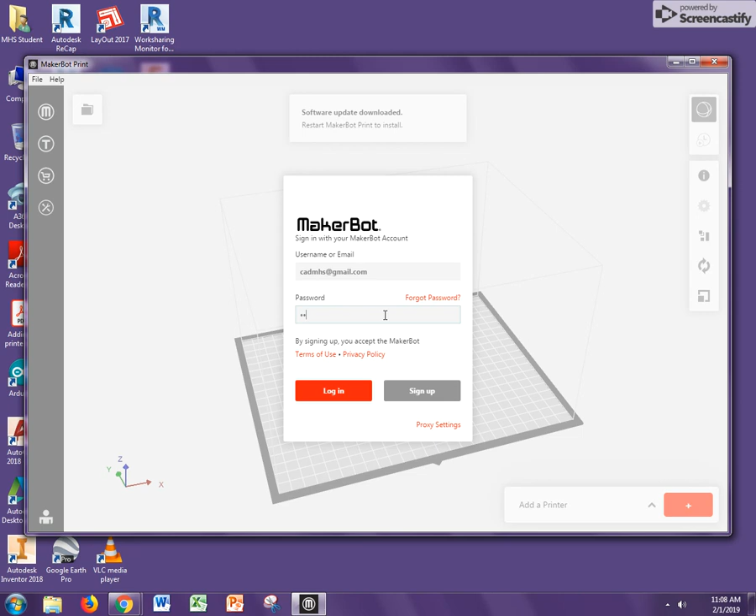Go to your desktop and find the Makerbot Print icon. Double click on that and the software will open. You will have to type in the username, which is written on the board, same as the other programs, and log in.

You need to select a printer, so it's going to be a mini, so you can hit select here. It's a mini because that's the kind of printer we have in our classroom. You can close that back down.

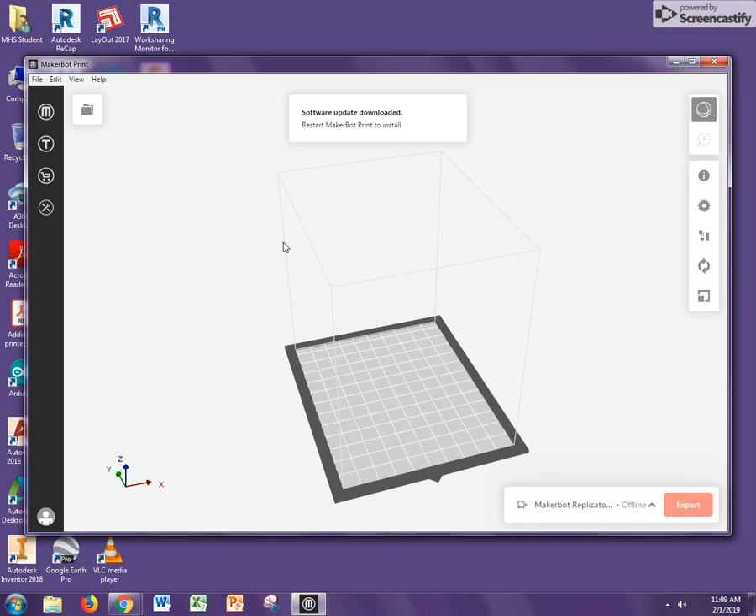Now what you need to do is insert your model. You're going to have to say insert file and find wherever you put your file that was exported from Inventor. This will only show up if it's an STL file, so hopefully you've already done that step in the prior video. I'm just going to open this random one.

Make sure that the model info is correct. So this was modeled as... sorry, I guess I don't have it right. If you modeled yours as an inch, you need to click this down and say inches so that it's scaled correctly.

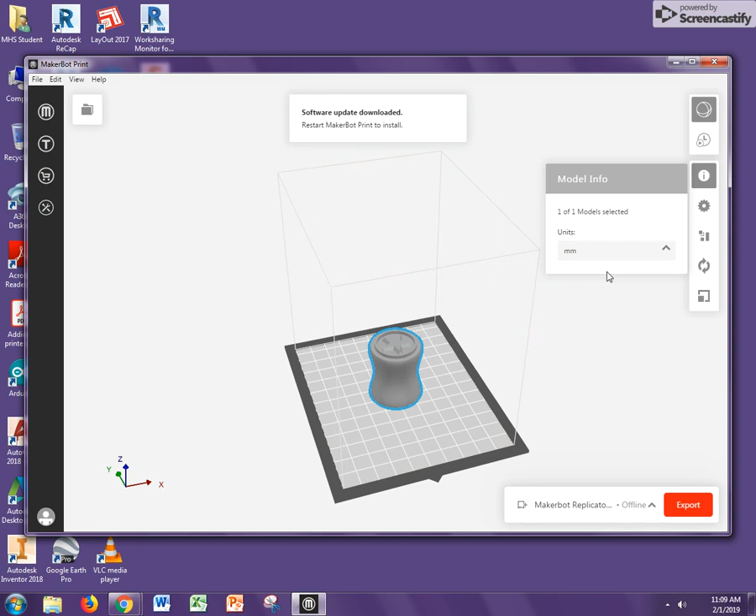You can see how it changes size based on what it thinks it is. This seems a little big to me, but this file was created a year or two ago, so I'm just going to go with it.

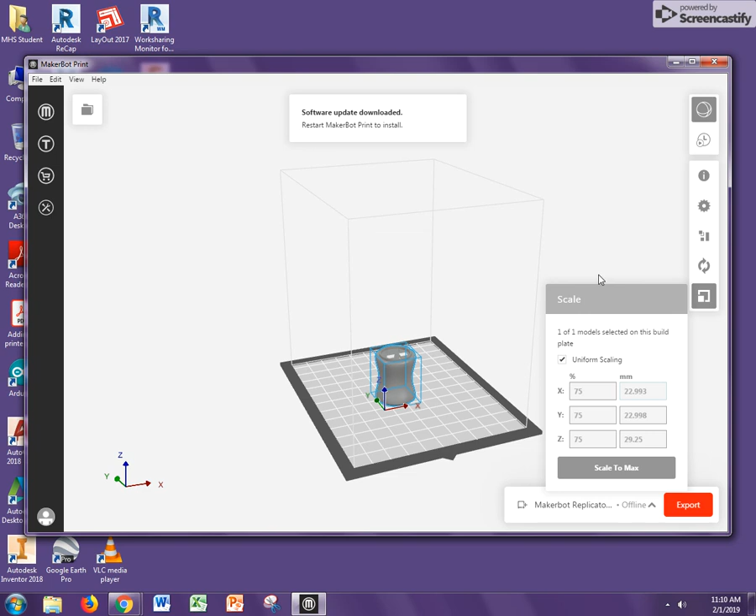If you need to scale it, you can hit scale here. So I think this looks too big, and this doesn't really matter how big this is. However, if you are working on a part where you took measurements and you need it to be exactly what Inventor said it was, do not use scale.

The other thing you need to consider is how your print will be oriented. This is how I want this print to be oriented because the detail's on the top, as you can see.

You can rotate the view around by using your mouse. You can move it in and out. Use the right mouse to rotate top to bottom.

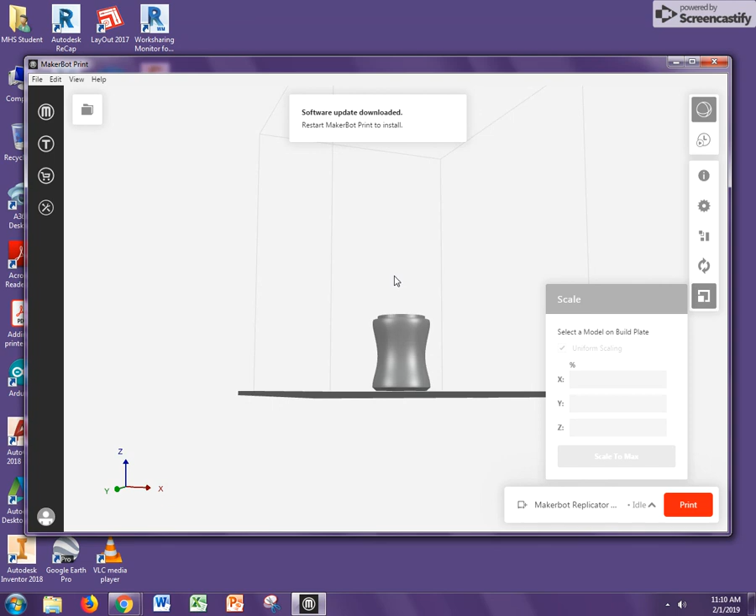Now, if you don't like the way this is oriented, you can click on this. You can use this image here to know which axis you should rotate around. So if I rotate around X, it's going to flip it. Obviously, imagine what it would look like with that.

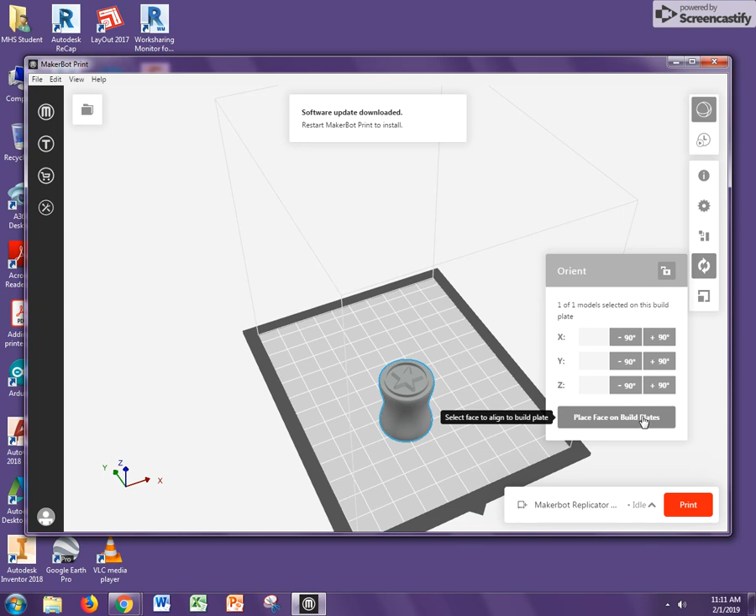So I'll just hit this, right? This is the Y rotation. You can also type numbers in here if you, for some reason, need an off 90-degree rotation. You can also say place face on build plate and pick the face. I also then like to go to arrange, and that puts everything right in the middle of the build plate.

This is something you have to do, print settings. Make sure that if it's appropriate, which for most of you it will be, you want supports on. And if you come to custom settings...

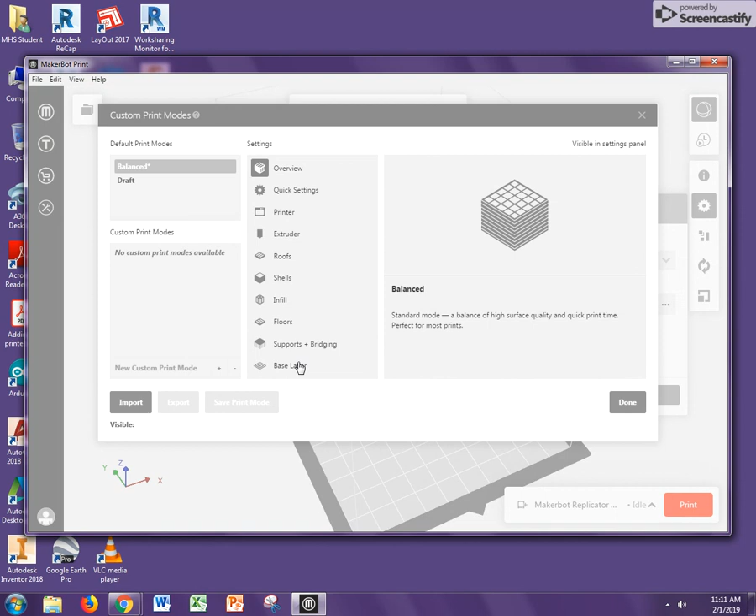This is where you can change any of those settings we talked about. You might want to check the infill density, make sure it's pretty low, so this will affect your print time and sometimes quality. Please don't go higher than, say, 20%, but check your print time and talk to me about it as well. This is just where you would make those changes.

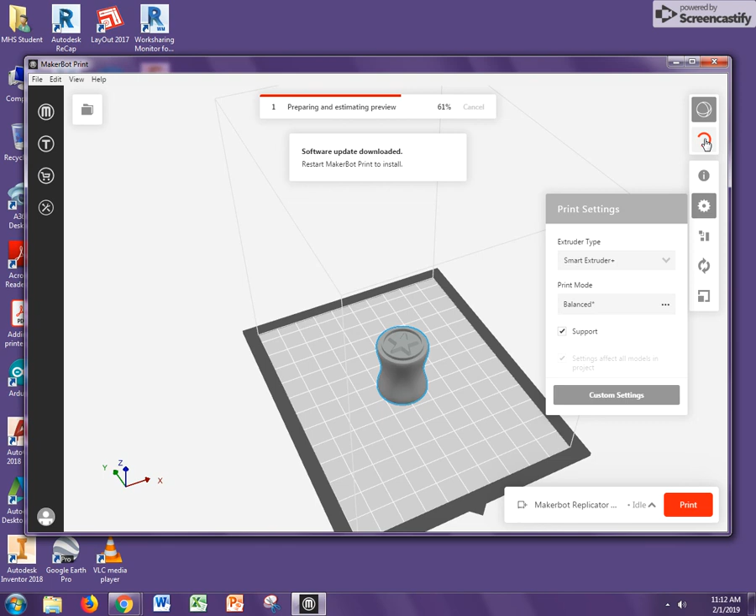Lastly, you need to come here, estimates and print preview. When you click this, it will give you a prediction of what the print will look like and how long it will take. As you can see, this orange is the raft.

Anywhere else in the model where you have orange is support materials, right? So you could uncheck this and it won't show that, but it's very helpful to have that. You could also say play animation and it will show you what it will look like as you go along.

Make sure that you have the supports in the right places.

Now, on the Google form, I want you to estimate or enter the estimate of time it will take to print your print. 40 minutes is pushing it for time for your models, but that's something that we need to discuss.

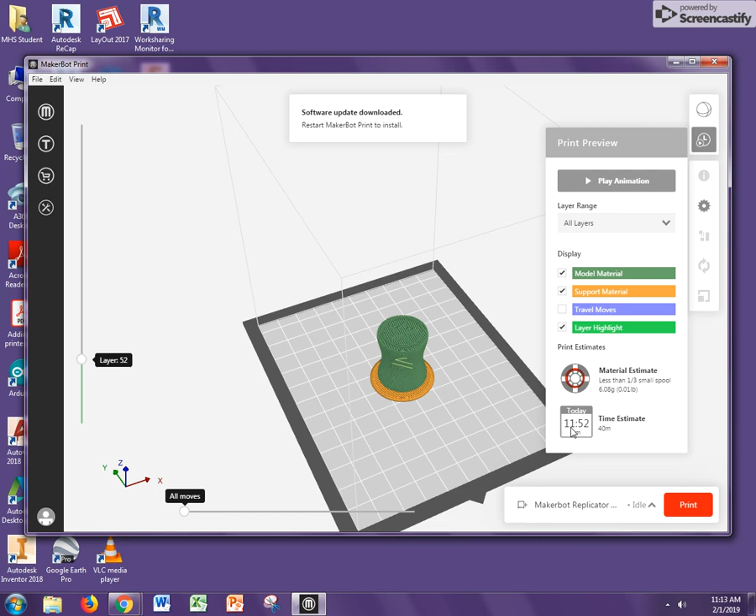So enter this into the Google form, and you also want to enter the color that you want on the Google form. Once you're done here, and you're still working on your own computer, you want to come over here and say File and Save Project, and save this in your Google Drive. Name it something that makes sense to you. First name, last initial, dash 3D print would be great.

So maybe Miss G dash 3D print. Save that to your Google Drive so that you can then upload this to Classroom. Make sure your name is on that file name.

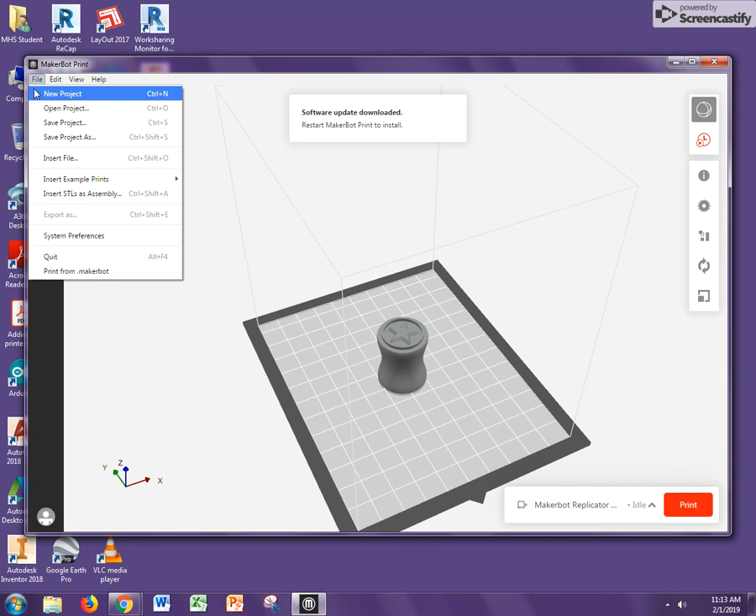That's it. Then once it's time to actually print, you'll want me there to help you, but you simply go to File, you can just hit Print here. But we need to make sure the filament's set up right and everything else, and you have to do this from the actual computer connected to the machine. That's it.